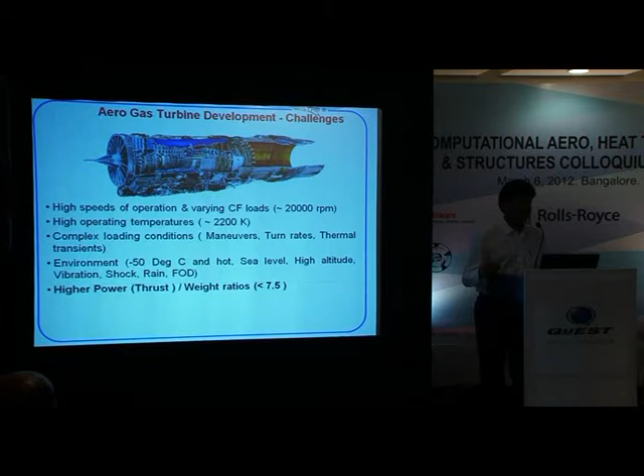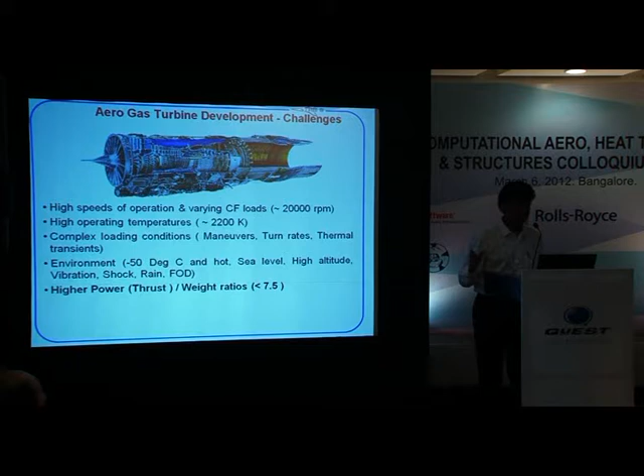In addition to these predictable loading conditions, we also have complex loads connected with maneuvers, turn rates, and thermal transients. So there are a lot of parameters to which you need to be sensitive when designing structures to operate under a wide array of environmental conditions, ranging from -50 degrees Centigrade to extremely hot conditions like those seen in desert environments.

But doing all this is very much possible if no one puts a restriction on the weight of the gas turbine engine. Unfortunately, it's not so. Whenever you're talking about high thrust, what immediately follows is the thrust-to-weight ratio. So whatever you do will be appreciated only when you can enhance the thrust-to-weight ratio.

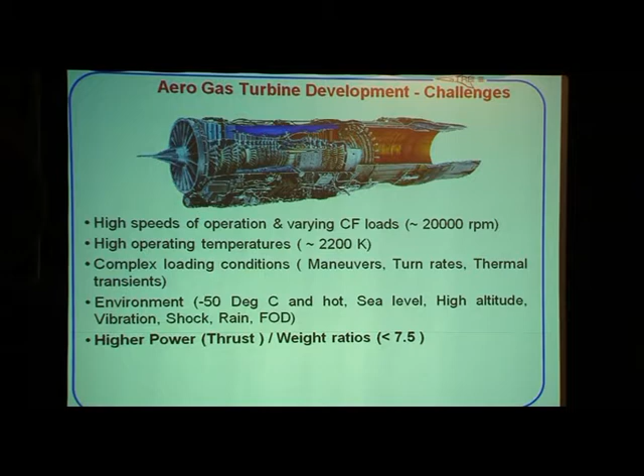Fundamentally, the success of CAE practice in the case of a classic gas turbine engine development is reflected in the enhancement that you can showcase through high power-to-weight ratios.

Now, I was debating internally in which way I can explain the story or evolution of CAE practices in the gas turbine engineering. There are several methods. One method is to talk about the role of FEM in aero engine design corresponding to impact mechanics, the assessment of flight loads and static casings, or the heat transfer analysis when talking about flow path components. When you talk about the rotor system, you need to discuss vibration analysis and rotor dynamics when it comes to transmission shafts.

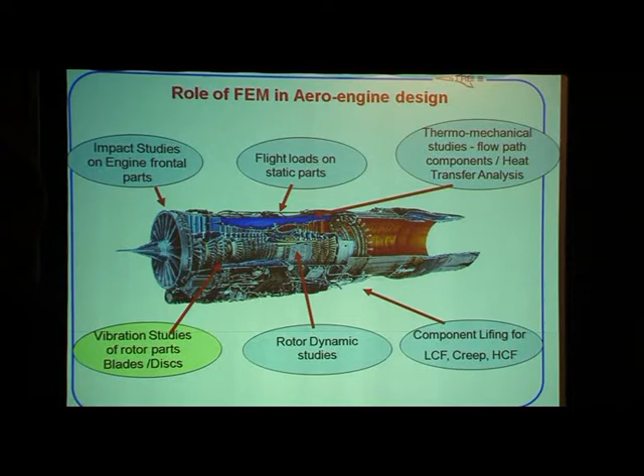In case of hot section components, you'll be talking about the combination of LCF, creep, and HCF. So it's possible to illustrate the impact of CAE on gas turbine engineering by discussing all these case studies. Another method would be to talk about the impact of FEA at different stages. We all know the very initial layout of the gas turbine engine is made based on preliminary 2D analysis, and then you go into the design optimization stage, where the impetus is toward maximizing performance.

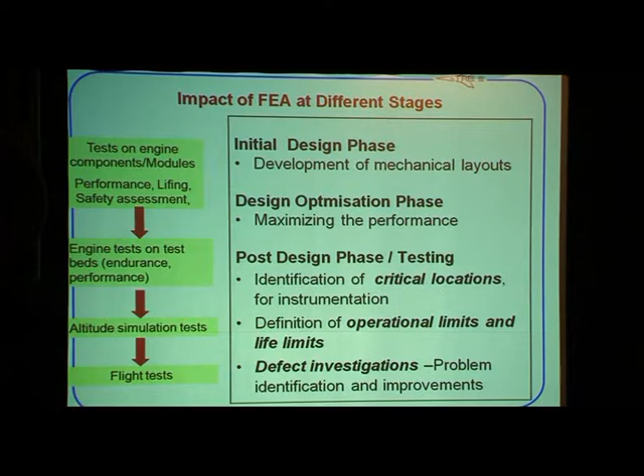Then, in spite of the fact that CAE is traditionally associated with the design cycle, CAE indeed has got a pronounced influence on the testing of the gas turbine engine, in the failure analysis, in the defect investigation. So it's also possible to describe the evolution of CAE practices with this kind of approach, which talks about design, during design and post design.

Another approach could be to talk about the modules. When you look at the standard architecture of a gas turbine engine, right from the inlet casing to the fan to the intermediate compressor to the combustor, beyond that hot section components like turbine, exhaust, and jet pipe, each of the modules have got their own set of lifing requirements and safety requirements.

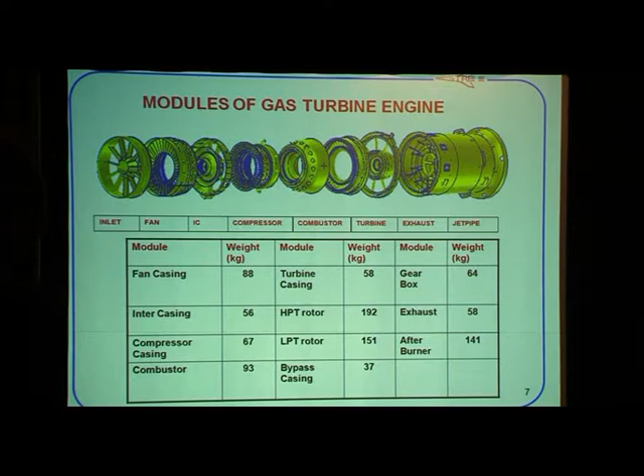When you talk about low temperature components like fan and compressor, you tend to be very, very sensitive to issues like LCF and HCF. And when you come to components like turbine and combustor, you'll be talking about the creep, the thermal fatigue, and the oxidation. So CAE has got an extremely important role in terms of fulfilling the design compliance with these challenging conditions.

But in addition to the design specifications, you also have limiters: in a situation where there is an overspeed at about 115% of the max speed, or the burst likelihood at 120%, still the structure needs to have the necessary integrity. And the primary failure modes could be because of the fatigue, the creep, or the overspeed and burst.

So what I am trying to drive your attention to is, whenever the CAE practitioner or professional is talking about implementing the CAE practices, at one point of time he'll be talking about the primary design expectations. At the same time, he will also be looking at the limiting conditions.

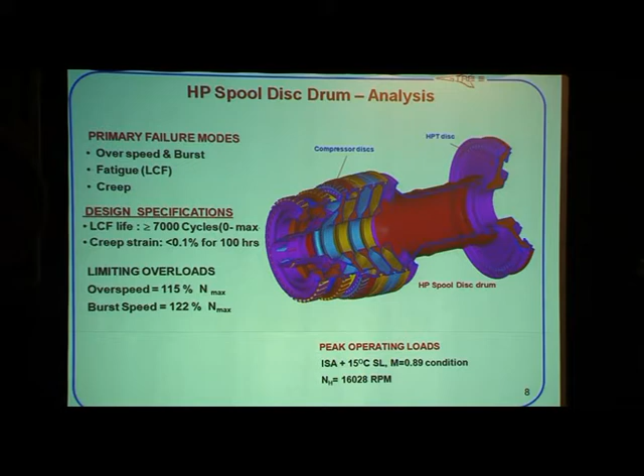There is always a propensity to talk about 3D modeling based analysis, but even today, at GTRE, we start off with the axisymmetric model, wherein you have got these 2D layouts of the discs and drums and the casings, simply because these long slender shafts are supported at the bearings with deep groove ball bearings. You put the axial constraints at those bearing locations, simulate the centrifugal loads, the blade loads, and thermal loads, assess the growth of all these components with reference to the bearing locations, and deriving the boundary conditions, you go towards the three-dimensional analysis.

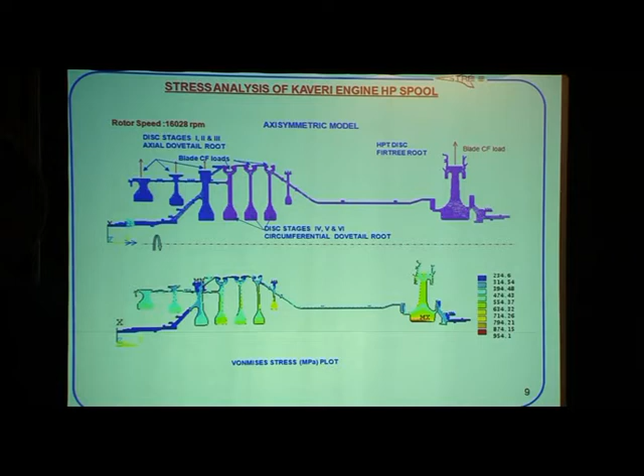So what I want to illustrate through this particular analysis is, in spite of the recent propensity to talk about 3D modeling and 3D analysis, most of the times the initiative as far as the CAE practice is concerned happens with a simple axisymmetric model.

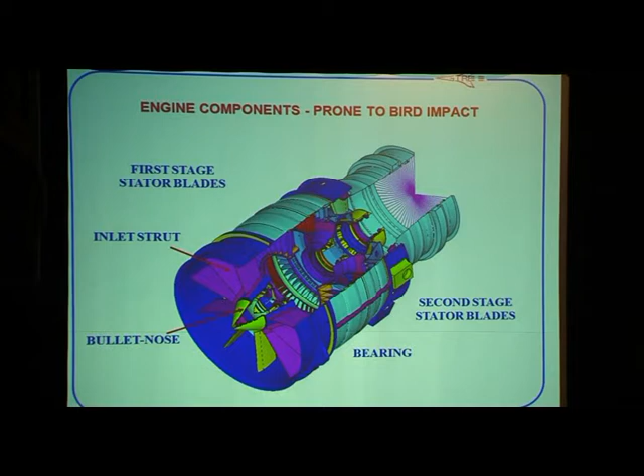Now, I talked about a structure wherein the loads are known to us, but there are also some structures which are susceptible to parameters which are not known to you, which cannot be assessed a priori. It could be a bullet nose, an inlet strut, or fan rotor or second stage stator blades. What do you do in this case?

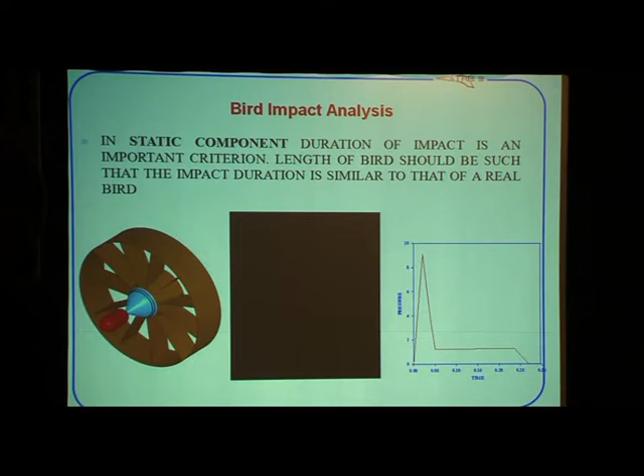It's a very nice story because the practitioner of this particular technology is my neighbor in GTRE, Dr. Rajiv Jain. I'm sure many of you know him, from the early days of Cosmos to NISA to MSC Nastran to Dytran. Now you talk about LS-DYNA. Originally, when GTRE was talking about impact mechanics, it was largely a static analysis. Whenever there is an impact stress, a simple empirical relation, 2 into the steady state stress, is what you were likely to encounter.

From those early days, now we have come up to transient dynamic analysis, wherein not only do you evaluate the deformation characteristics of slender blades when subjected to foreign objects, but you also calculate the containment capability of the casing, and in case of a blade off, what happens to the balance, what kind of transfer of loads goes to the bearings, and if there is a crater created by the impact of a simple pellet or a small bird, whether this crater can lead to dynamic stress concentration with concomitant effects on the lifing.

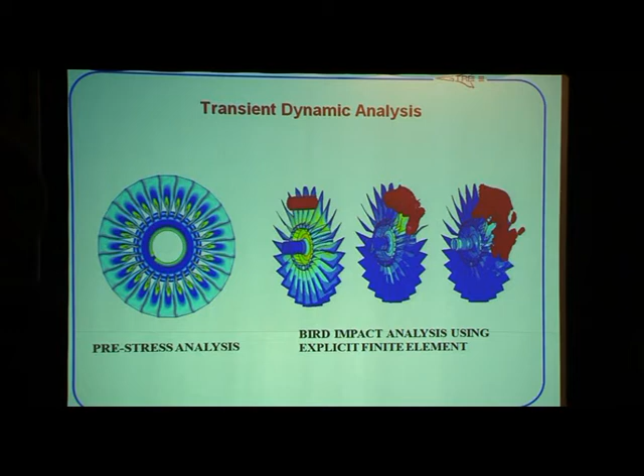All this is possible because of the humongous improvements in the processing capabilities of the computers, as well as the ever-growing capabilities of the analysis software solutions.

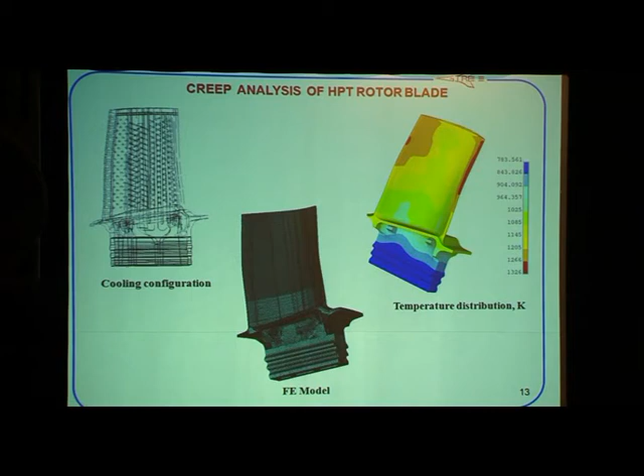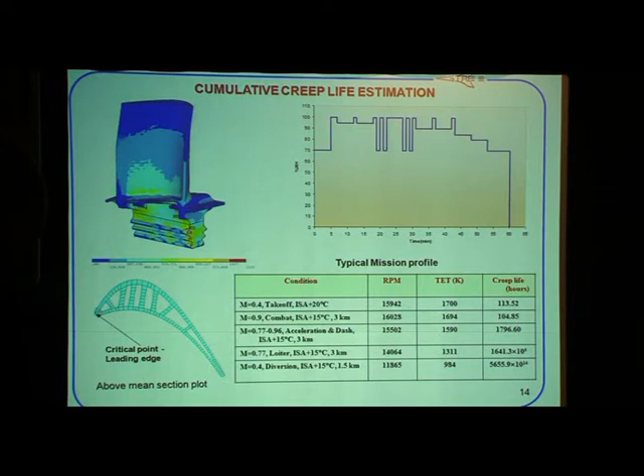Now, I talked about the components which operate on the low temperatures. When I'm talking about low temperatures, I'm only talking about the temperatures with which the titanium structures can comfortably operate. When you come to the HPT rotor blades or LP turbine blades, typically these components are cast out of superalloy nickel materials, and in these cases you need to have a study on the mission cycle, wherein you can identify the steady state dwell periods corresponding to different dwells at stages like takeoff, combat, loiter and diversion. You calculate the creep, and the whole sum of the cumulative creep would be a useful commodity in terms of estimating the turbine blade life.

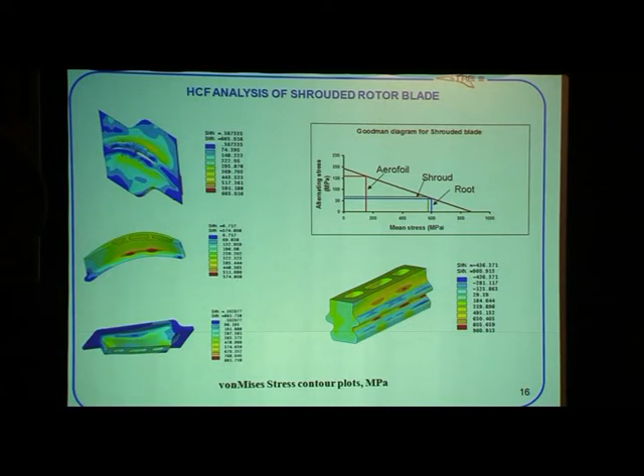Now, when you talk about the HCF analysis of the turbine blade, you calculate the stresses corresponding to the locations like root, shroud and aerofoil, and corresponding to the mean stresses that you can calculate, you can identify the allowable vibratory stresses, which in turn decide the reliability of this particular component under cyclic conditions.

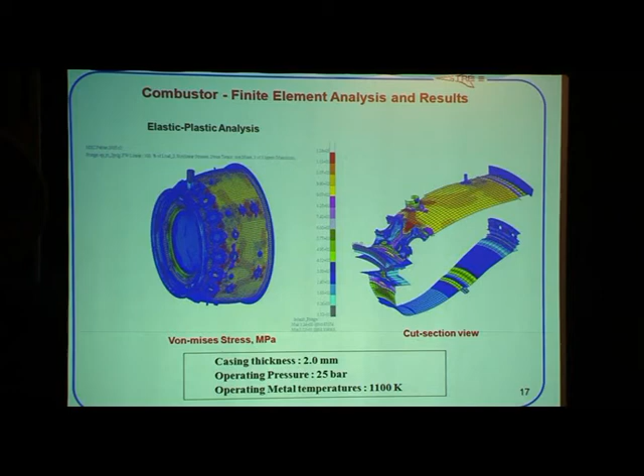Now, whatever components I talked about, they were all bulky in nature, but unfortunately in case of a gas turbine engine, you do come across several places where the components are made out of sheet metal like structures. For example, in case of a combustor, the casing thickness is just about 2 mm, but if you look at the operating pressures, the max pressure could be as high as 25 bar, and the max metal temperature could be as high as 1100 Kelvin.

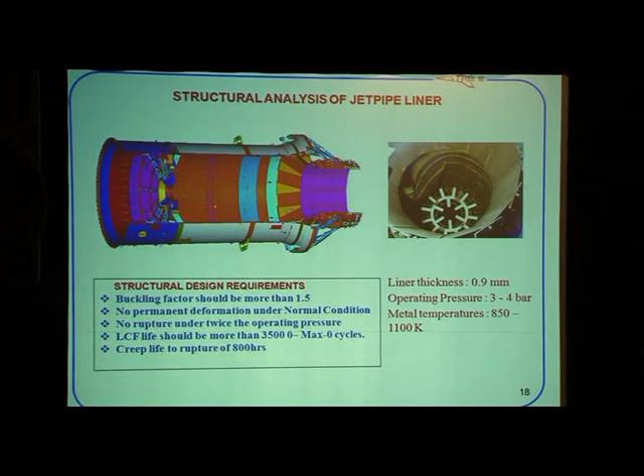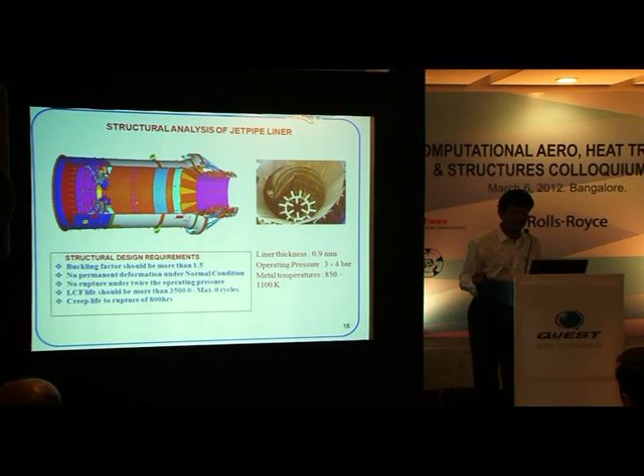And one more structure which is made out of sheet metal is a jet pipe liner, wherein the liner thickness could be sub mm, and the metal temperatures even in this case lie in a span of 850 to 1100 Kelvin. In these instances, you don't really talk about LCF, but you would be very, very cognizant of the fact that they are prone to buckling, the permanent deformation under normal conditions will be a big no, and the creep life to rupture will be close to 800 hours.

So the finite element analysis, when it is applied to thin section structures like the jet pipe liners as well as the combustors, has got its own set of challenges which are radically different from those which you encounter when you are analyzing the turbine blades or compressor blades.

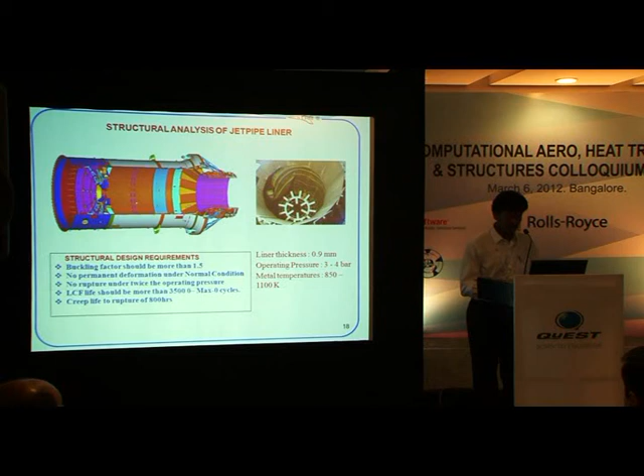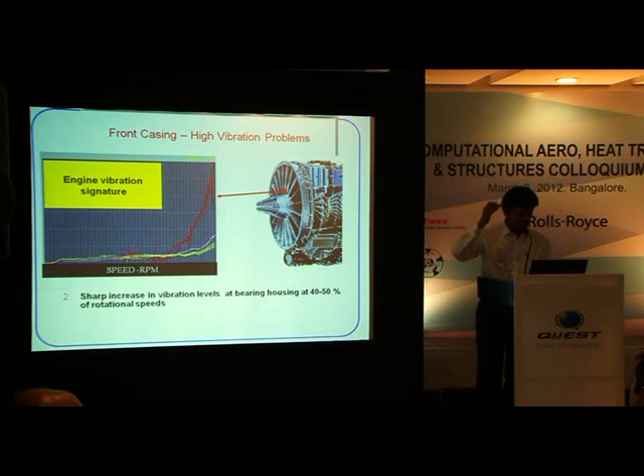Now, I talked about the application of CAE techniques only with reference to the design, but more than the design, as soon as the metals are cut, you do encounter some problems in the very early stages of the turbine development. For example, I am very sure Mr. Sundarajan would remember, because this is a problem which we encountered 10 years ago. In the front casing, there was a sharp increase in the vibration levels at the bearing housing, even at very low rotational speeds. So what the CAE team did in this case was, they kept on iterating with reference to the number of struts. They introduced some stiffeners. With all these, the vibration levels were brought down, which was also validated with the help of a dedicated test in our mechanical analysis group.

All other problems which I talked about never had a business driver as a goal. In this case, the business driver, as far as the gearbox is concerned, is weight reduction. The casing of the gearbox has been subjected to vibration loads, blade off loads, and manual loads. And in spite of the fact that it's an extremely complex geometry, and that the combination of so many different kinds of loadings could be a big challenge, the CAE team was able to cut down the weight by as much as 25%, not only through an approach oriented towards mechanical design, but also through an approach which looked at substitution of aluminum alloy with a magnesium alloy.